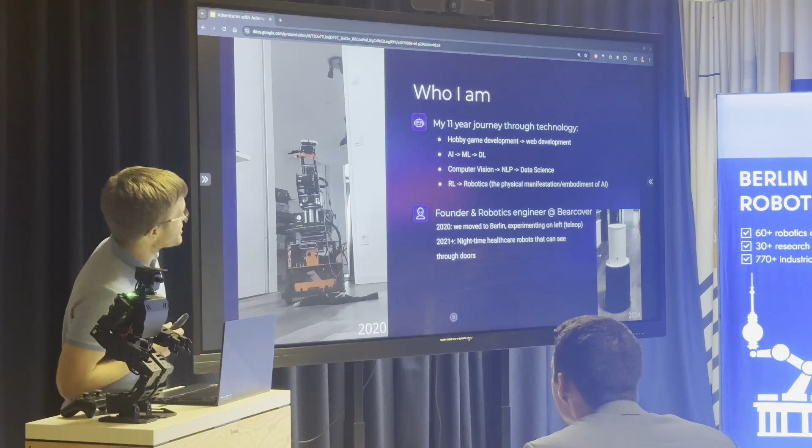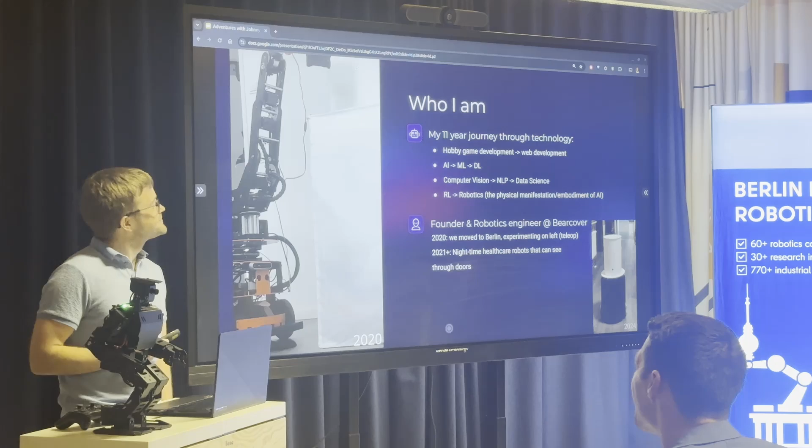We were experimenting with lots of different ideas on the left. There was a monstrosity that we built to put some socks into a hamper. And maybe some of you might have seen Fernando's talk a few months ago, where he talked about our nighttime healthcare robots that can see through doors. That's on the bottom right there.

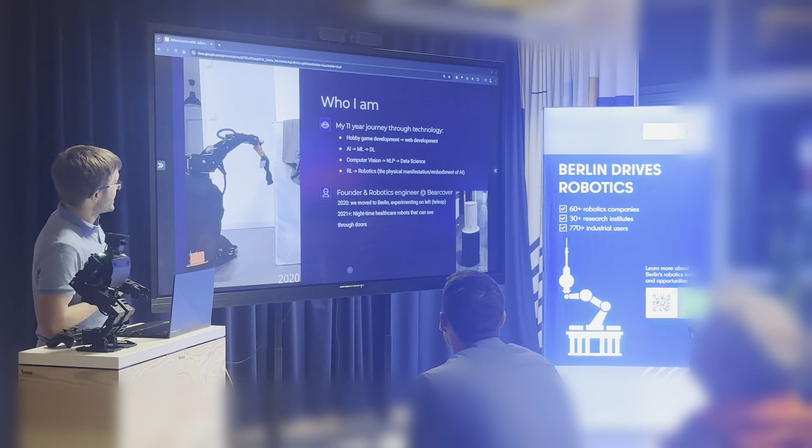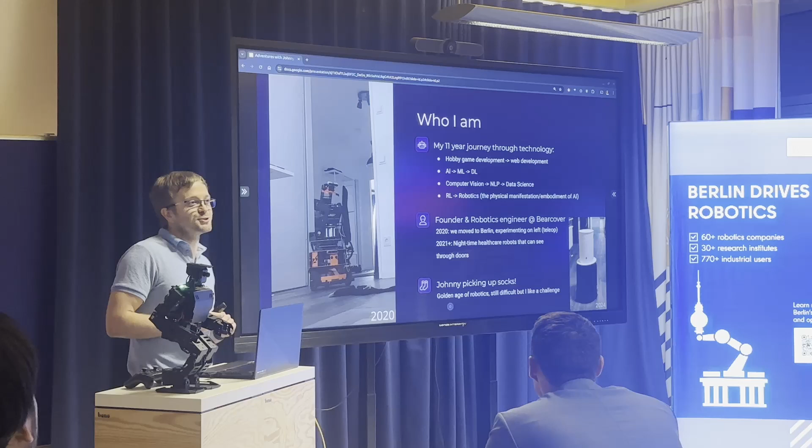And so all of this madness and all these different technologies brought me right here, right now, to this point for Johnny picking up the socks. I really think that this is the golden age of robotics, but everything is still very, very difficult, and humanoids are also difficult, but I like a challenge, and it's making me a better roboticist.

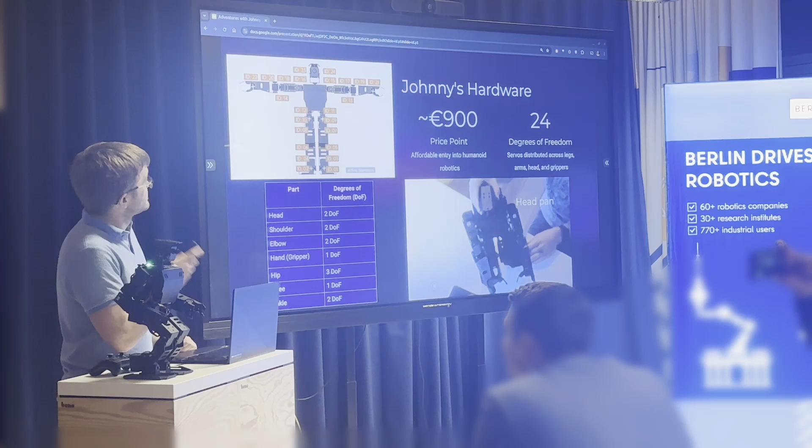He has 24 degrees of freedom, meaning 24 servos: 2 in the head for pan tilt, 2 in the shoulder, 2 in the elbow, and 1 in the gripper. That's for grabbing things, it's super useful and enables manipulation. He has 2 in the ankle, 1 in the knee for kicking and squatting, and 3 in the hip.

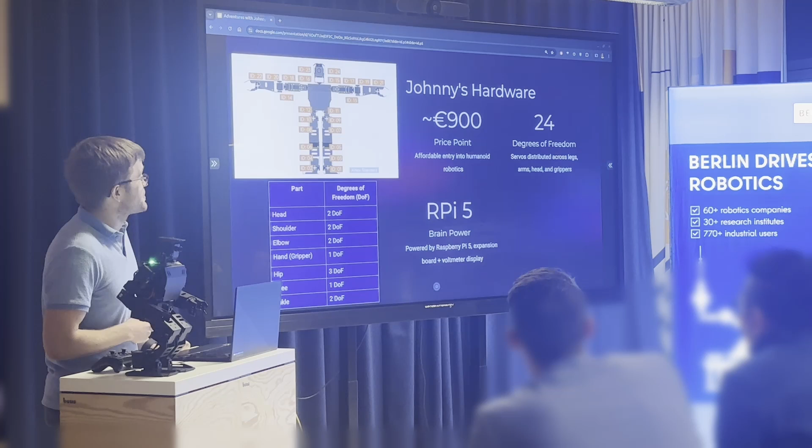He's powered by a Raspberry Pi 5, but usually I'm using the laptop over the network for the neural network. He has an expansion board and voltmeter display. Some other extras are the IMU, 2-hour battery life with a LiPo, and this kind of bad rolling shutter camera in the head, which I have to keep replugging and resetting, but it's okay.

As for his software, it's all ROS1 Noetic. Pretty much all of it is modifiable. The only thing that's not modifiable is this proprietary leg inverse kinematics and gait control, but that doesn't bother me because it just works, and I have bigger fish to fry.

I'm working on a more higher level problem. So pretty much I control his yaw angle, how much he's rotating, and also how fast he walks forward. Here you can see an example of this.

This is soccer visual servoing, what he comes with. He's able to track balls with visual servoing, meaning if the ball is to the left, go left. If the ball is close enough, kick.

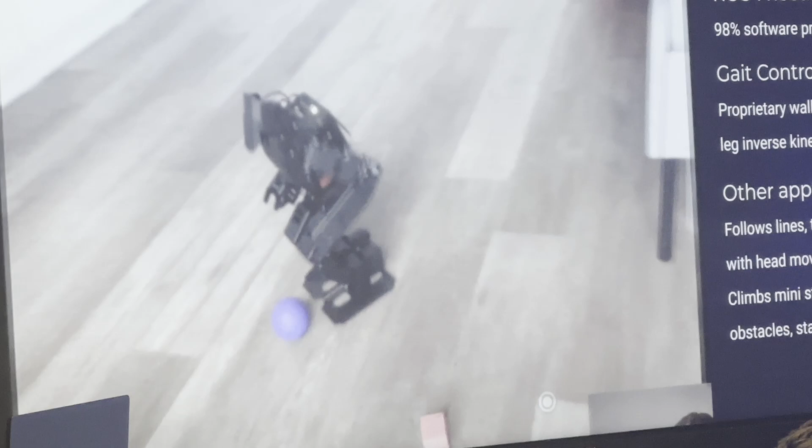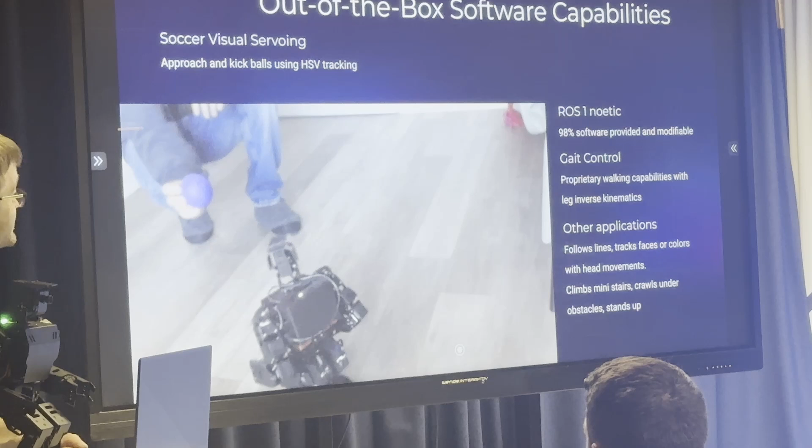He has some other applications as well, like tracking faces, following lines, and he can stand up if he fell over. He's a good boy.

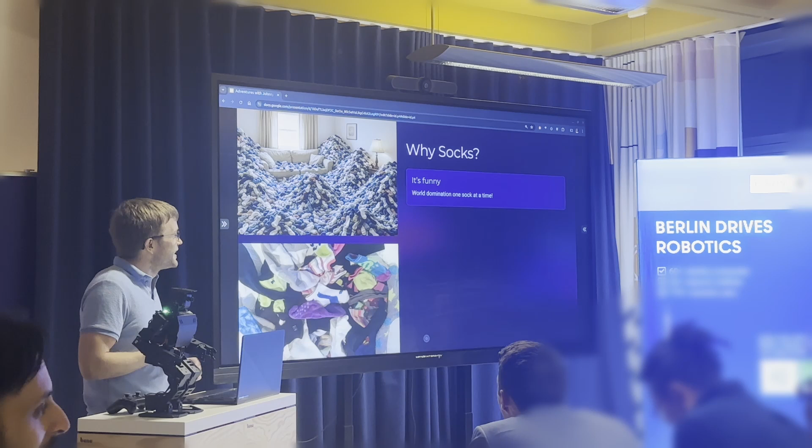So you might be wondering by now, why socks? Well, I just find it funny, it gives me a chuckle. Life is a bit absurd, and robots are also a little absurd.

But also it's a semi-useful loco manipulation challenge. There's a reason we haven't seen robots manipulating in our homes, and the reason is it's hard. You'll see why. And also it's a stepping stone to more complicated tasks, for example, clutter clearing.

Here's Roborock on the left. They announced this year, you can actually buy this, and it's bringing, for example, this sock to the container as a more general version of this task. You can actually buy this for like 1,400 euros. So manipulation is coming to our homes.

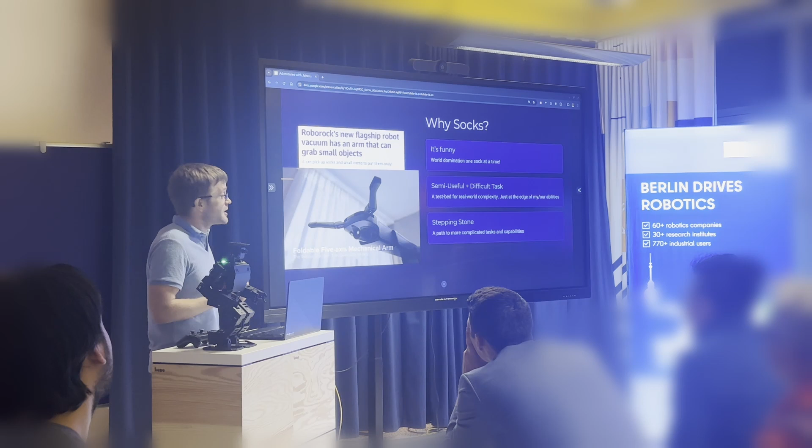The revolution is coming, but very slowly. I would say it's useful for parents, or kids leaving their toys everywhere. Mostly my girlfriend leaves them everywhere. But at least Johnny has a purpose now.

So let's actually solve the problem. You do this by compartmentalizing, abstracting, and simplifying the most necessary parts of the problem.

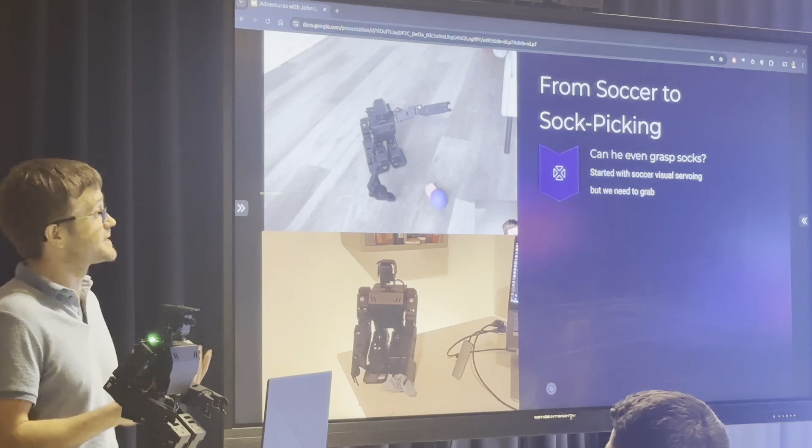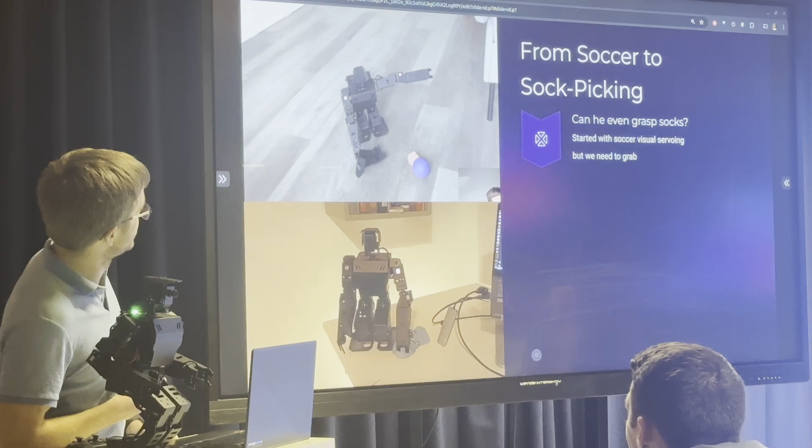So the first thing is, can he actually grasp deformable soft objects? And yes, he can, with a kind of keyframe-based grasp, meaning the same joint angles every time. You see where he's grabbing? That's on the right arm, and this is on the left arm.

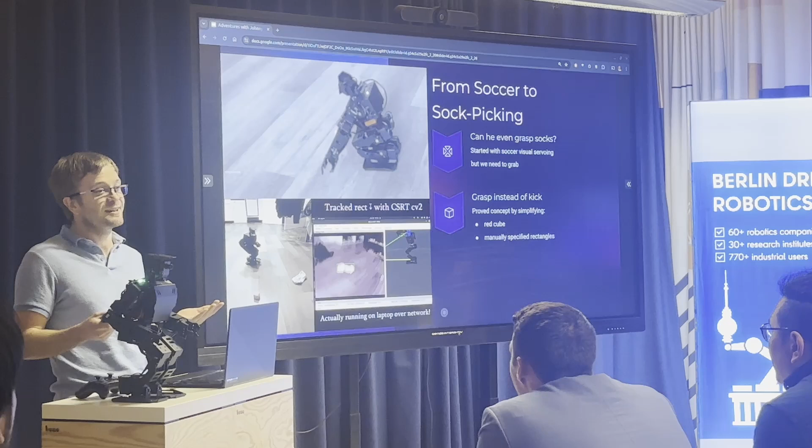Now that he can grasp, I thought we could do the same thing as soccer visual servoing, but instead of kicking, we're going to grasp the sock. So I proved this concept.

Remember, I should simplify. First by this red cube on the top left, and on the bottom left you see this manually specified rectangle. You can choose which to track, and I'm actually tracking this over the network with OpenCV.

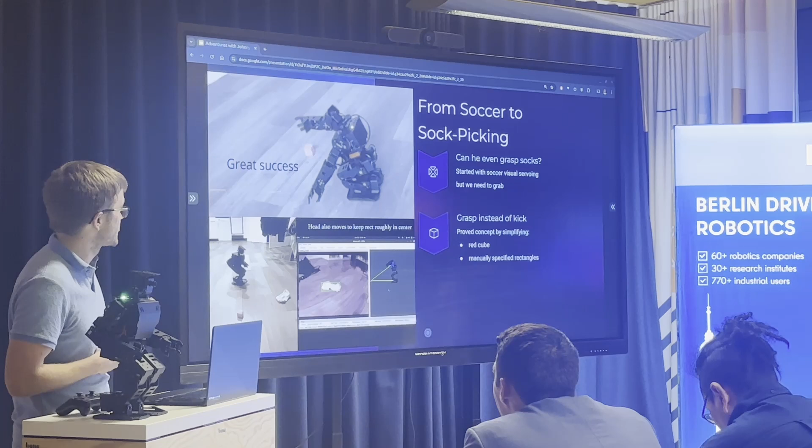I also improved the visual state estimation of visual servoing by projecting from the head, given the angles of the head, towards the ground to find a 2D position on the ground. This helps him find the sock better.

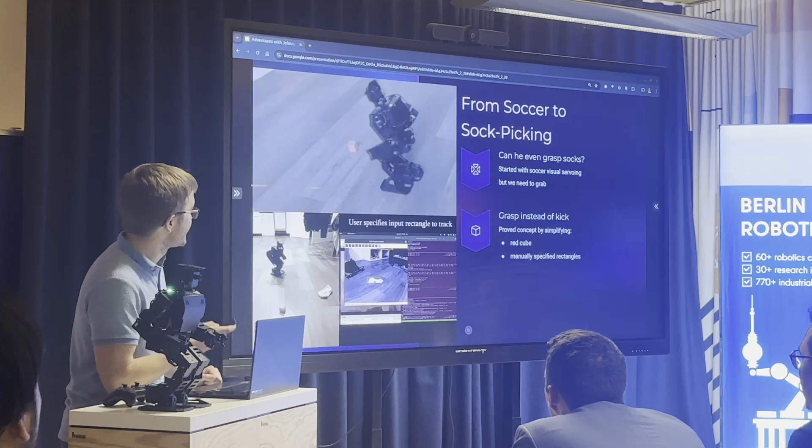And now that I've proved that we can pick up things by manually choosing rectangles, the main thing that's left is just autonomously finding the rectangle.

So you can see there's some problems with this. Initially, I thought it was going to be way easier than it actually was. I first tried Dino V2 foundation model, I also tried Vision Agent from Andrew Ng. And yeah, socks are quite a hard object to detect. I think I need more ensembles and maybe 3D perception to get higher accuracy.

So what's the learning from this? The real world is hard. Moravec's paradox states that the things we thought were hard would be easy, and the easy things hard. For example, we thought coding and chess would be harder than truck driving. We were wrong.

So the real world, we make all these plans, and then the real world punches us in the face. And then, as I already mentioned, the software is quite difficult. There's lots of architecture, flow diagrams, and functional diagrams, and things get quite complicated, lots of abstraction, tens of thousands of lines of code, and things get quite difficult, and every time you add a component there's more sources of error where things can go wrong.

So I won't spend too long on the edge cases, but he fails to detect the socks, he fails to track, he loses tracking, he didn't grasp well enough, he fails to realize that he failed to grasp, and he ends up standing on the sock he's trying to pick up. How do you deal with that edge case? How many thousands of lines of code do I need to deal with that? Shaky servos, shaky head while walking, and he's fallen so many times, I'm just banging my head against the wall, but here's the result.

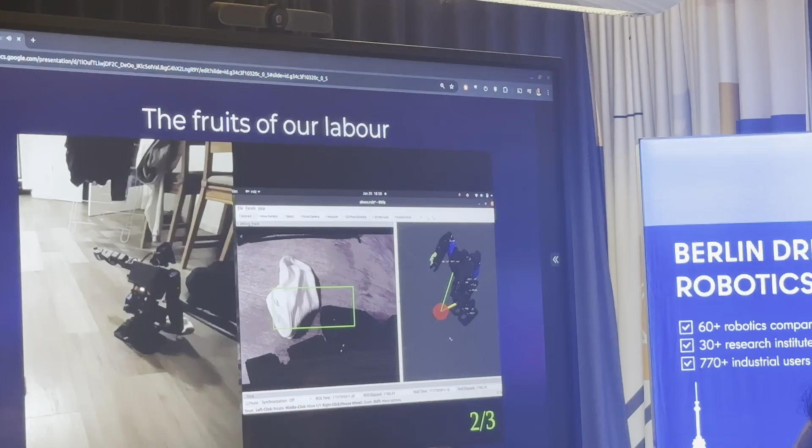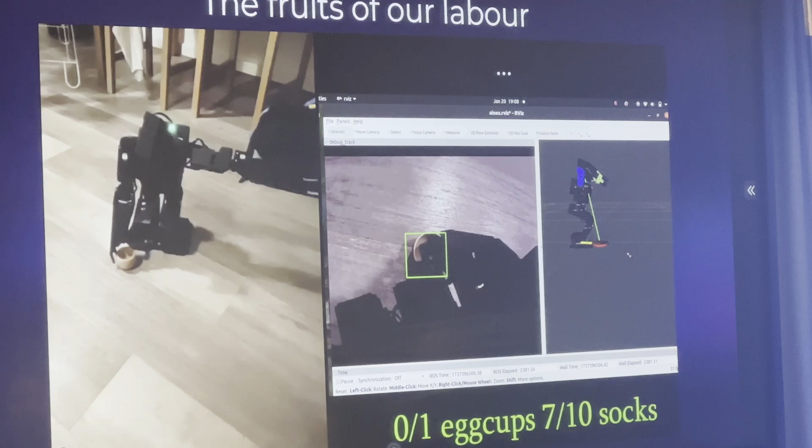Socks picked up, Johnny's got it.

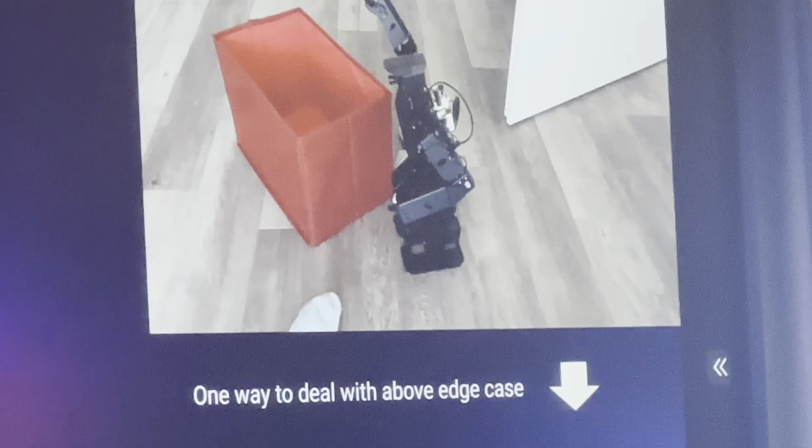So after I knew the socks were working somewhat acceptably, I moved on to the harder task of clutter clearing, and you can see he kind of had a horrible fall here. That's just because his arm was then coming down on the container, and he didn't plan for that, of course. So one way to deal with this kind of edge case is to retreat after you drop the sock into the box.

You can see I'm retreating a little. I don't have too much time.

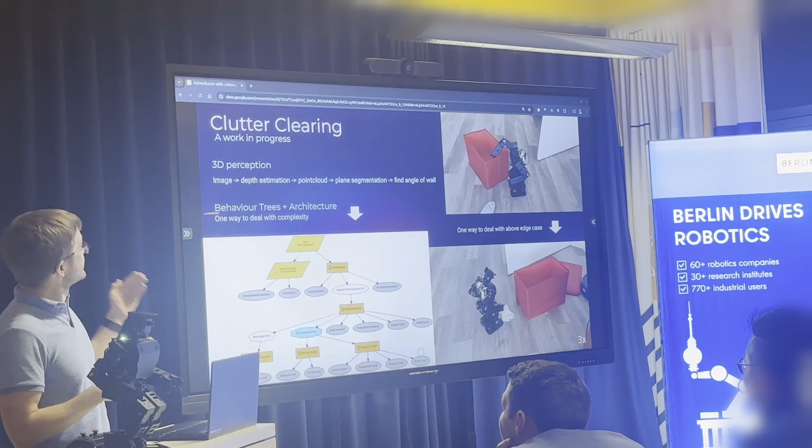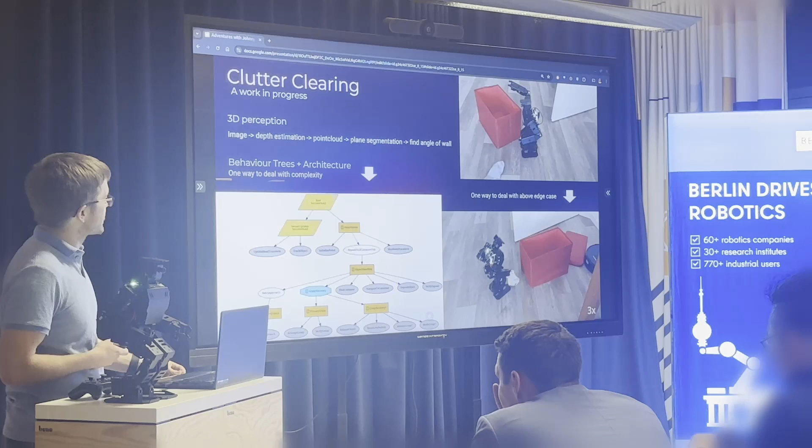Some other cool stuff I'm doing. There's only one lifetime and so many things to do with humanoids. On part 4 of the series, I was doing this kind of mic drop application in PyBullet with some kinematics.

I'd love to talk to Johnny more. I have some initial things, but I'd love to talk to him more naturally.

SLAM I've always loved, but I want visual inertial SLAM. But that's going to be a bit hard again with this rolling shutter camera. On the bottom left, I'm showing some motion retargeting, which is taking human poses and then mapping them to robot joint angles. Here's someone doing a jumping jack, two robots, and me doing different movements.

I've also done some reinforcement learning, a very basic version of just trying to make them stand up. It's always funny to watch this, and you get lots of TensorBoard plots, loss going down or not.

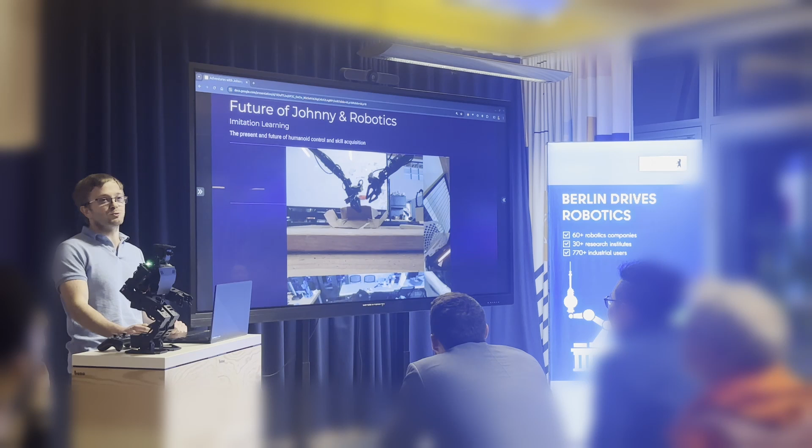So what is the future of Johnny and robotics? There are three areas which are making rapid progress. The first is imitation learning. This is actually enabling some things thought decades away to actually do things in the real world for hundreds of different tasks.

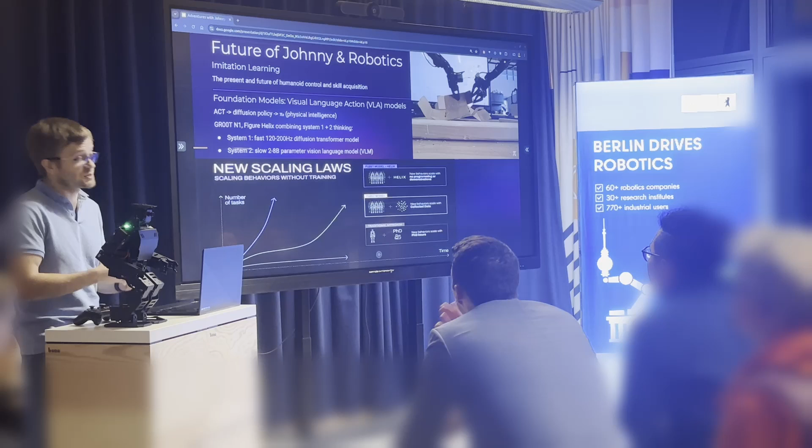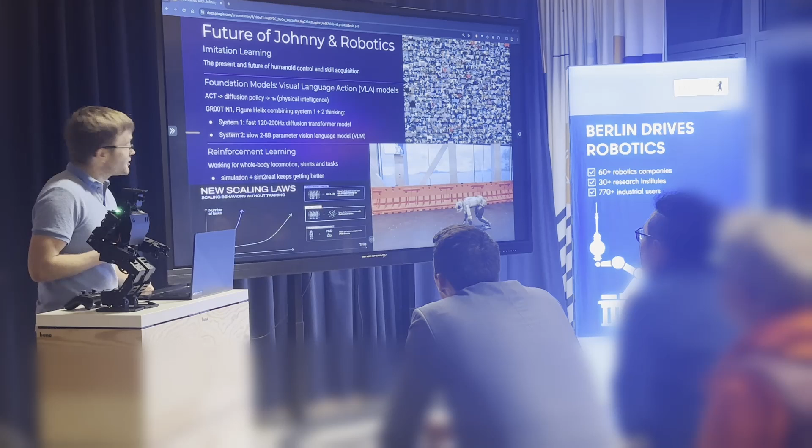Another one is foundation models. This takes it even further. So instead of one task, now these models can actually do hundreds of tasks to some accuracy, and it's all one general model that just takes in text and outputs actions. Many different models I'm mentioning here. And also reinforcement learning will scale this even further to get us to 100% accuracy and to do stunts.

Here you see Boston Dynamics actually breakdancing better than me, and doing a cartwheel. And after that you actually see Helix from Figure, able to pick up pretty much any object with this humanoid.

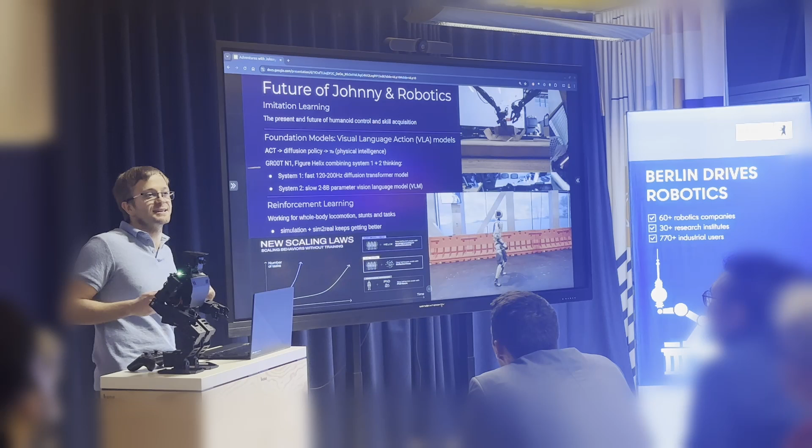I could talk for hours about all of this, but in short, everything before was pretty much classic robotics. You explicitly estimate the state of the world, you plan, you react, you control. Lots of hand engineering. I don't think this is likely to scale to thousands of tasks.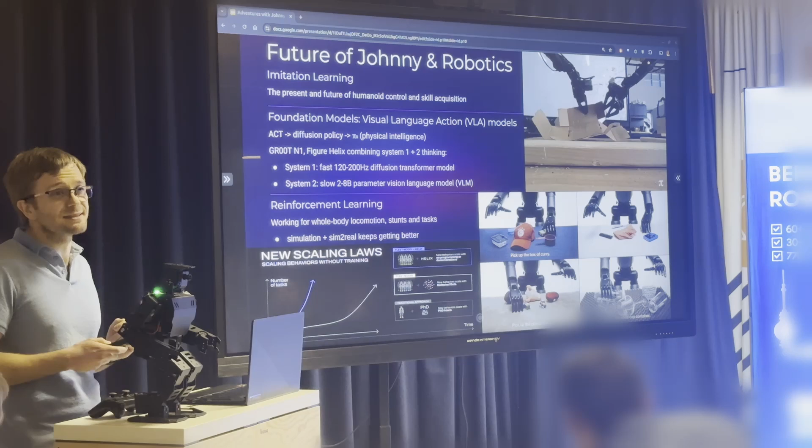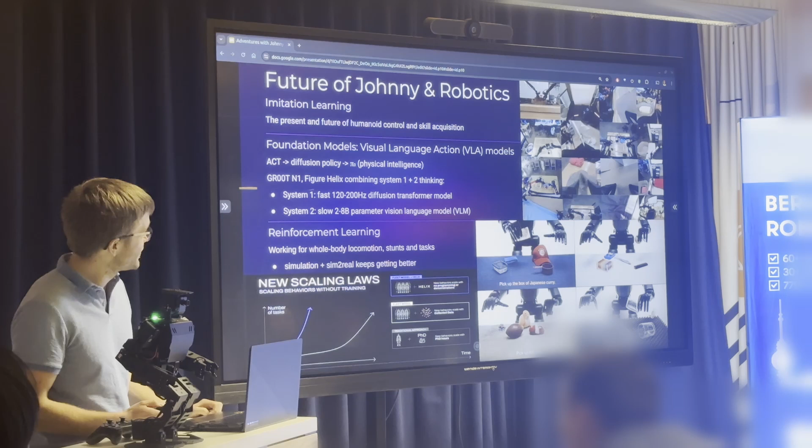Whereas the future of robotics, I would say, is more implicit. We let models themselves decide what is important, what is the next step, what are the correct actions. I think this is the holy grail of robotics, if it actually works. That's left to be seen. The hype cycle of humanoids has gone so high now, it might take way longer to get actually tens of thousands of humanoids deployed, but progress is happening fast.

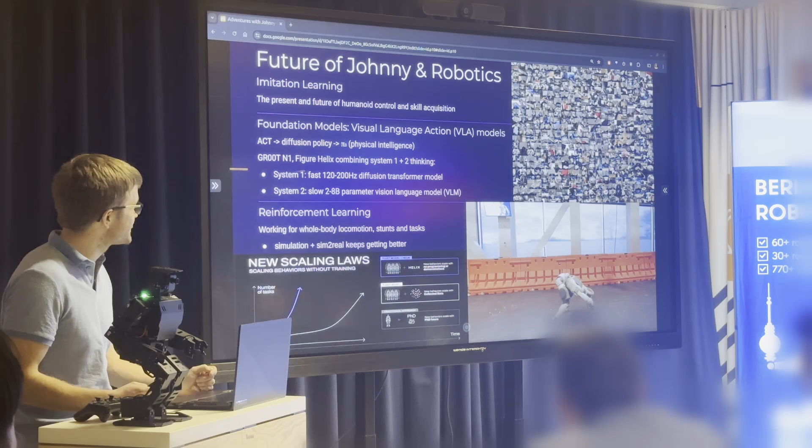I'm actually going to CoRL 2025 in Seoul, South Korea, to see this robot learning bubble, to see how much of it is true. This is why I believe we're in the golden age of robotics. There is a path to deal with the complexity of the real world.